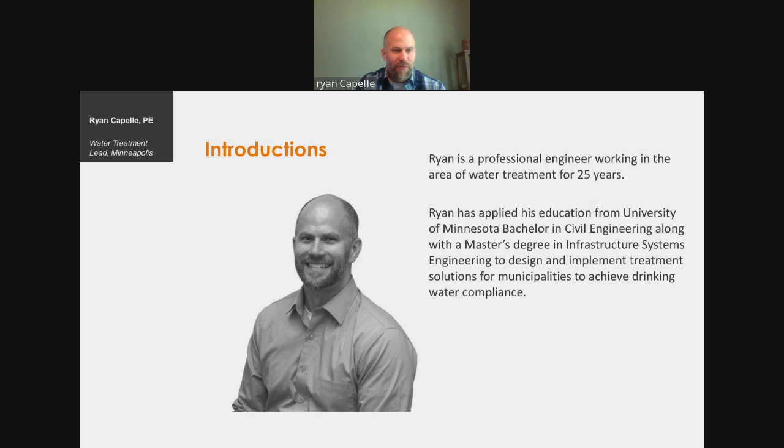Our goal today is to talk with you about PFAS in drinking water, and particularly about solutions that keep municipalities in compliance. The key word here is compliance, because that means different things for different areas of the country, different states, different jurisdictions. My hope is that after this presentation you'll have a better understanding of those differences.

So the agenda: I want to begin by giving a little background on PFAS. Bear with me, I know we're coming from a lot of different perspectives. I'd also ask that you understand the perspectives we're sharing today are our view as of May 12th, 2021. This topic of PFAS is evolving and changing every day, so recognize that we're giving our best view of it as it stands today.

With that in mind, we'll talk about some of the treatment options available to municipalities today. To make it more real, I'll bring in a case study for one of the communities we've worked with, in Cottage Grove, Minnesota. You're fortunate to get an update on the current status of a pilot study that's underway, so fresh off the press you'll get some up-to-date information. Then we'll summarize the solutions we discuss and end with a question period. I expect this to last about 50 minutes, so I'm hoping to give you your money's worth.

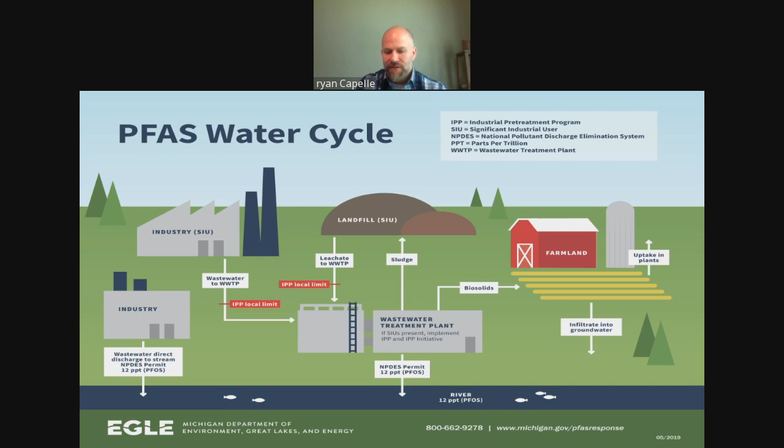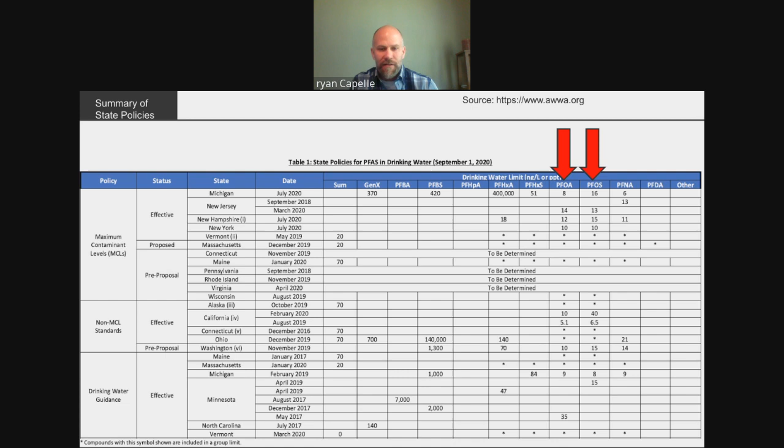But we're looking at, in Minnesota, 7 different substances. And I'll point out, if you can see it, Minnesota is one of the only states that has a guidance value for PFBA, a short chain PFAS substance. You'll notice that number is very high compared to some of the others - it's 7,000 parts per trillion, or nanograms per liter. That'll come into play later in the presentation.

Here's another way of looking at that same data. If EPA has established 70 parts per trillion for PFOS and PFOA, you just see on the bar chart how some of these states are much, much lower than 70. Others which aren't on the list - Joan and I are working with the state of Illinois, they're proposing a limit as low as 2 nanograms per liter for PFOS and PFOA. So that 2 would compare to 70 established by the EPA. A much different perspective depending on where you are.

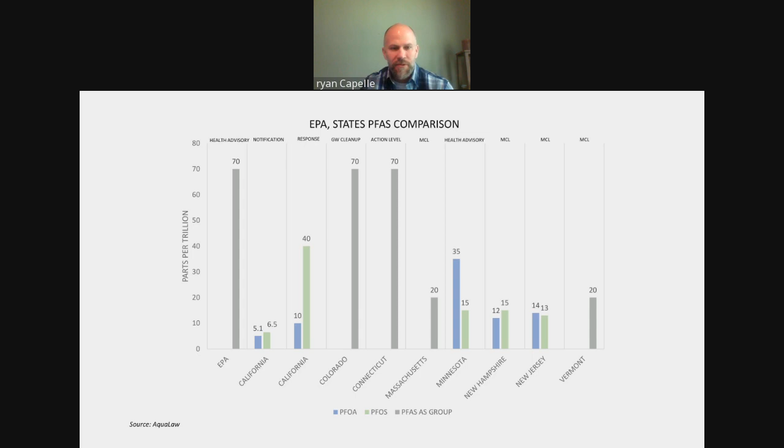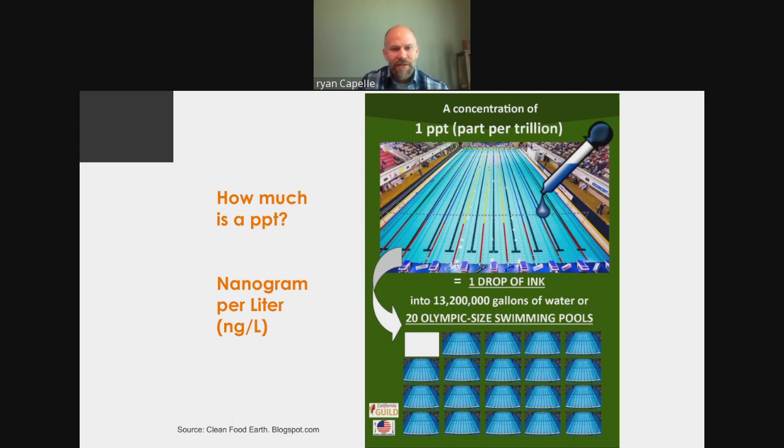I even thought another analogy would be that it's almost like trying to kick a field goal while there's an earthquake going on. And then there isn't much margin for error. We're talking about parts per trillion, nanograms per liter. To put that in perspective, it's 1 drop of ink in 20 Olympic-sized pools. But toxicologists and epidemiologists are finding that just that small amount is enough to make a difference. It's not an easy feat, but the good news is there are solutions out there.

And so I'm here to talk to you about a few of those. Currently, conventional drinking water treatment methods have almost no impact on PFAS. These are forever chemicals, is their nickname, and that's because they are ubiquitous in the environment and somewhat in our bodies, and they don't break down. So we need to explore solutions to give these utilities and water purveyors a chance against this issue.

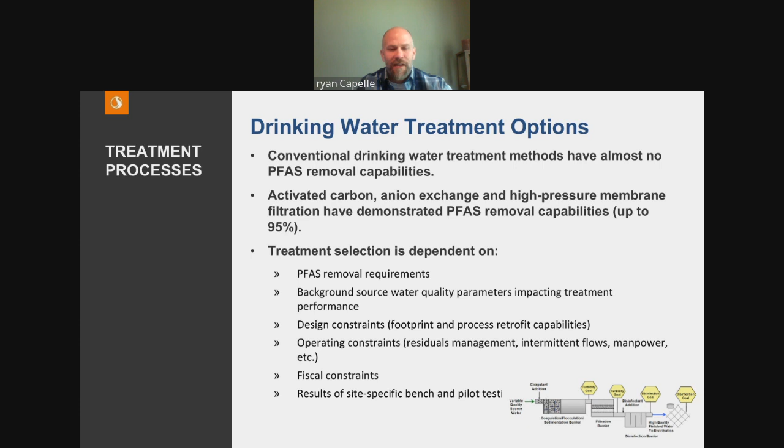The lowest hanging fruit, the most available technologies today, as we see it, are activated carbon, ion-exchange resins, and high pressure membranes. And the good news is they've been proven to be able to remove about 95% of these substances. There's all kinds of factors that I mentioned earlier - we have background source issues, different concentrations, different footprints of these treatment technologies. So some sites may be able to accommodate treatment technologies, others may not. Lots of issues to consider when we're looking at options and solutions.

So here's a simple diagram of the three technologies that are ready for prime time. GAC, the granular activated carbon treatment process, is put together in a column, a downflow column where water comes in from the source, whether surface water or groundwater, and flows through the GAC column, with the permeate coming out the bottom. Same situation with ion exchange resin.

When ion exchange is used as a sorbent, it's typically top to bottom flow. The other option out there is reverse osmosis or nanofiltration membranes. With that, we flow through the membrane and the permeate comes out the other end, free of PFAS essentially, but there's a reject stream. The issue here is we need to do something with that liquid continuously.

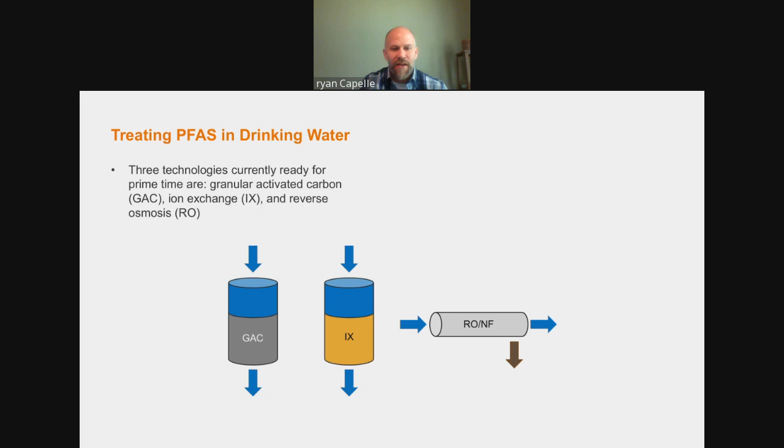The issue with GAC and ion exchange is the material goes through and the PFAS adsorbs to the surfaces of the GAC and the IX, and then eventually becomes exhausted. We can then remove that GAC or IX, ship it off to proper handling, and that can be processed appropriately.

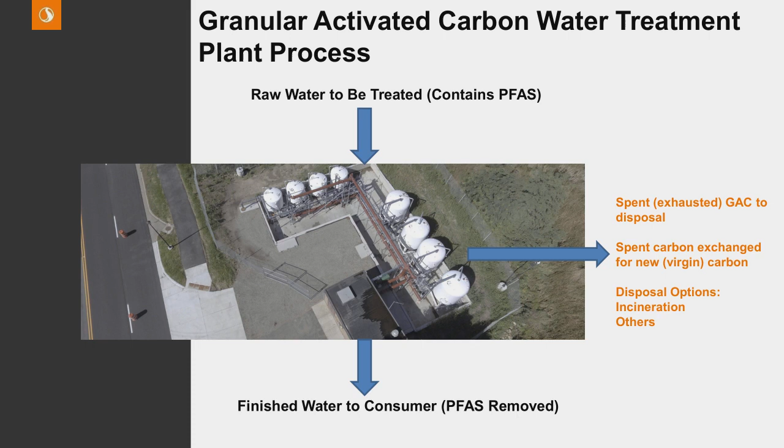So a little closer look at GAC. This is a picture of one of the interim treatment plants we've installed, showing that same concept where water comes in the top of these vessels and the effluent flows out treated from PFAS. But eventually that material has a finite life, and the GAC becomes exhausted, or all the surfaces become covered with PFAS.

So the strengths of GAC are its long, good history of success. It's good at removing long chain compounds, or the 8 carbon chains like PFOS and PFOA. There are multiple suppliers, a lot of study on it. Essentially, it's a very well accepted treatment technology.

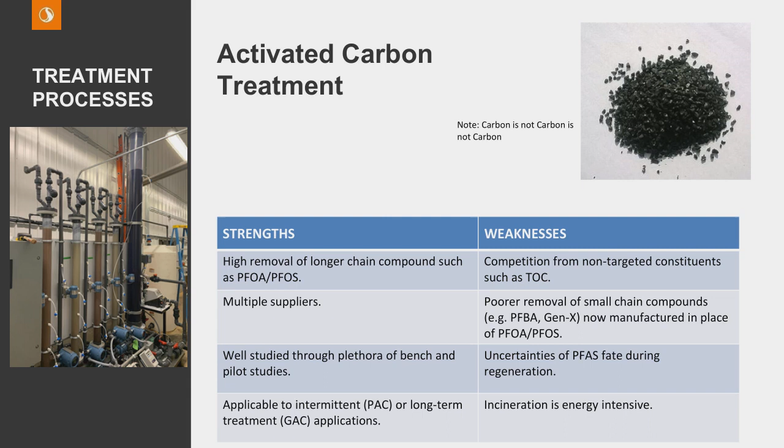The weaknesses are that it doesn't quite have the ability to do its job when there's high TOC. It doesn't do as well against short chain PFAS like the PFBA I mentioned earlier. And there are some uncertainties as to what happens with this carbon once we ship it off.

The important feature of carbon is that we're looking at the empty bed contact time. There's a finite amount of space on the surfaces of these granules that can receive PFAS, so the capacity is finite. Eventually we need to remove that media. In fact, sometimes, as you'll see later, some material can get kicked off of the surfaces through the treatment process, and we actually end up with higher concentrations in the effluent. So we need to watch that with GAC and be cognizant of the empty bed contact time.

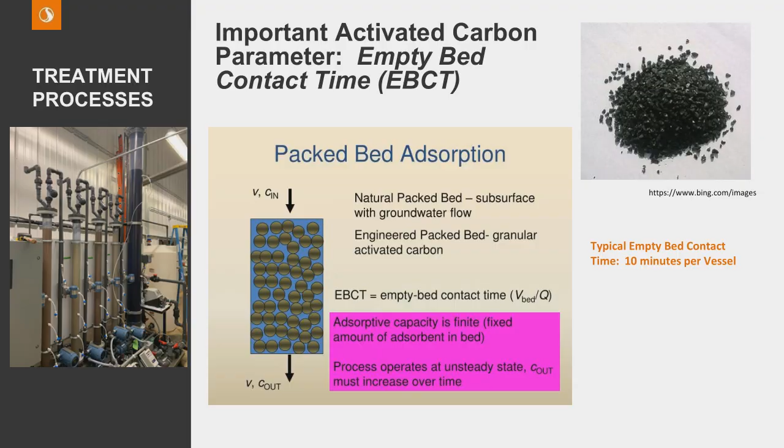Another example with GAC is that we use a lead-lag configuration. There's a redundant filter, if you will, where we go through a lead filter and capture and test for the PFAS substances in the effluent. Then that effluent runs to the lag filter and runs through a second course of media. That way there's a safety factor that the Department of Health can observe and monitor that lead vessel to know if things are starting to break through before knowing they have a lag vessel available.

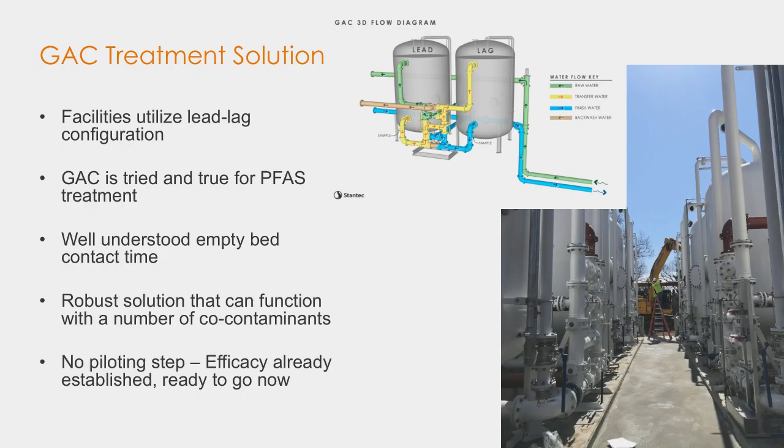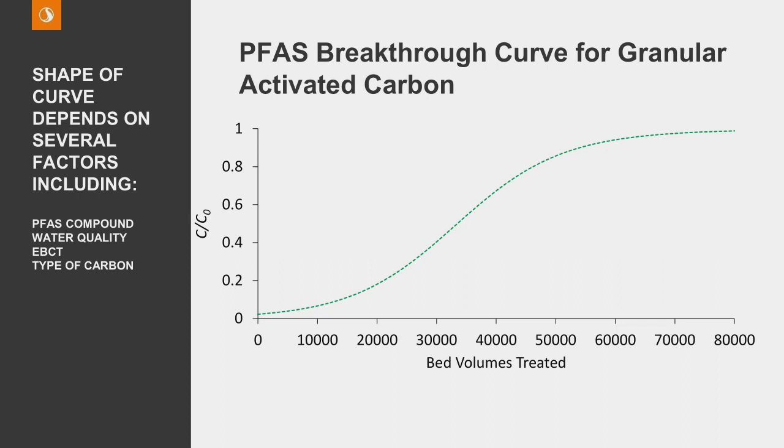So it's tried and true, a robust option out there for utilities to use. With that understanding, we know roughly, or generally, with a given water quality, how long the carbon can last. It's site specific, definitely specific to water quality and different parameters like TOC and concentration. This graph shows concentration on the left and bed volumes of throughput on the bottom. Over time, we can gain an understanding of what the breakthrough curve looks like, and we can start to predict how many bed volumes we're going to get through for a given water quality.

So now we can move on and talk about ion exchange as another solution option. The strength for ion exchange is it's a little better on short chain PFAS, which I'll show you later, and still effective on the longer chains. The issue with TOC is a little less than that of GAC, and there are shorter empty bed contact times required for the same removal. That means we can pack this material into smaller vessels and a smaller footprint.

The weakness, and you'll see this firsthand in results, is that there are some issues with complexing materials in the water, such as iron and manganese or other metals, and sometimes those can really cause a problem if we don't have pretreatment. For cleaning this, it's not a type of material we can clean safely with drinking water - it's a one pass option for the most part. There are folks out there trying to generate regenerable ion exchange resins.

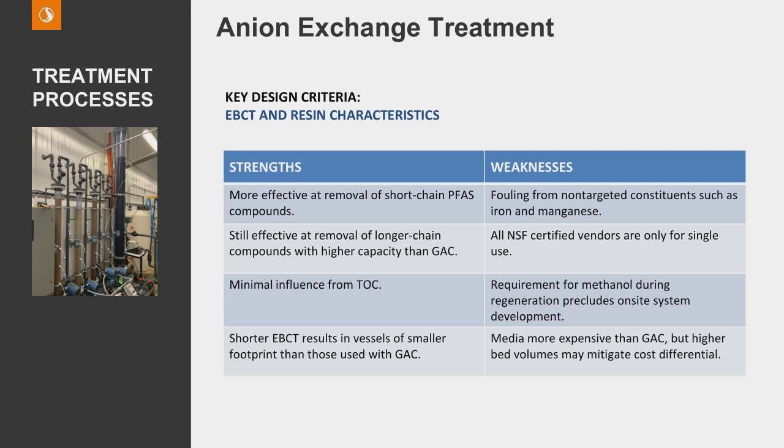To give you a little picture here, like the other with GAC, we have water that comes in the top of these vessels, the effluent comes out the bottom, and eventually we will entirely remove the ion exchange resin and ship that off for processing.

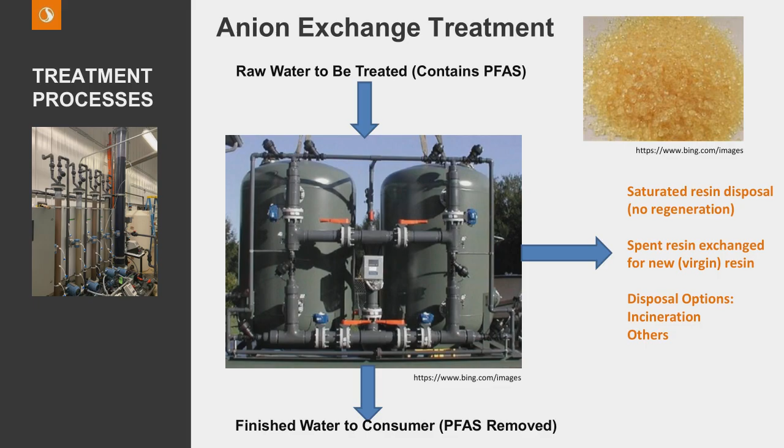The next option is reverse osmosis or nano filtration. The strength here is that it removes nearly all of the substances, 99%, and there are multiple suppliers. The weaknesses are that there's limited disposal options, and like I said earlier, there's that consistent reject stream that we have to deal with.

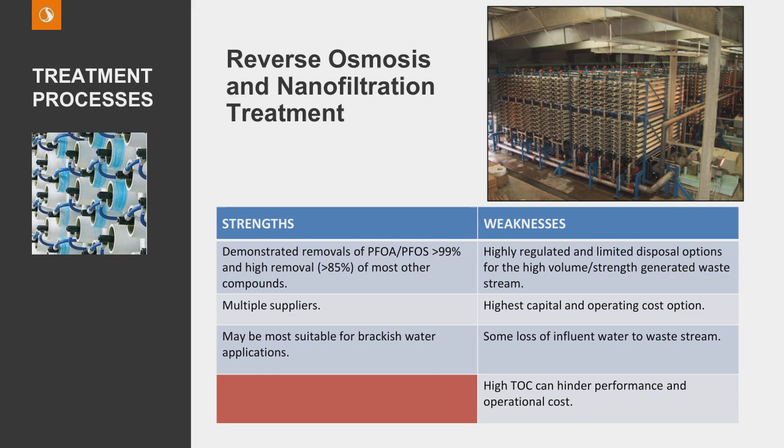That reject stream is going to contain PFAS, so now what do we do with that? There are companies, as we speak, working to develop technologies. We know there are super adsorbers out there that can receive that reject stream, and eventually those types of sorbents will become more commonplace, and we may be able to see reverse osmosis used more as a common treatment solution for PFAS.

But as it stands right now, as far as our team is concerned, the two lowest and most viable are GAC or ion exchange. I mentioned all the different folks out there developing, everyone's trying to solve this issue and design a better mousetrap, if you will. There are novel adsorbents being considered, anything from coconut to different synthetics.

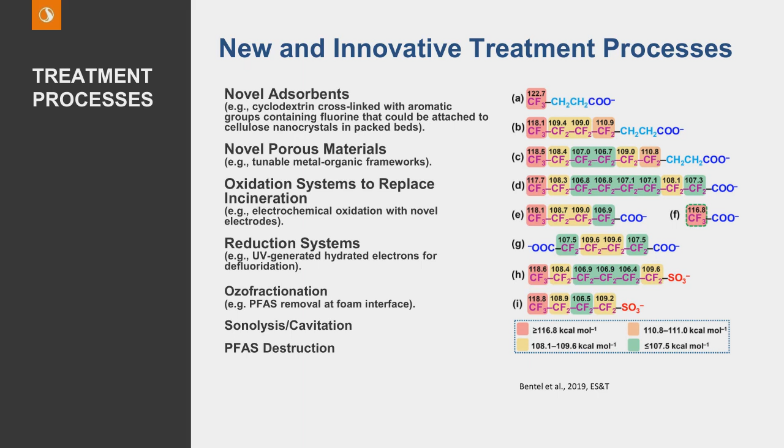We're looking at porous materials, oxidation systems, redox, ozofractionation, sonolysis, and ultimately the holy grail would be if we could find a technology that actually breaks the fluorine carbon bond. That's something that is very difficult to do, but there is promise out there. I've observed systems myself at the academic level that are showing promise in being able to break that PFAS and destroy it. Just not ready for prime time as we speak.

When it comes to providing solutions, we want to help these communities that are in some cases in a state of crisis. One of those is Cottage Grove, Minnesota. So this is where I want to try to give you a little real world example, with a little background before we dive into Cottage Grove, Minnesota.

Minnesota is the home of 3M, Minnesota Mining and Manufacturing, a company that back in the 40s and 50s was generating these PFAS substances for different things, like stain-resistant carpets to the Teflon on your pots and pans. Wonderful innovations and great engineering took place, but now as we learn that it can cause health issues, we need some innovation to try to remove those substances from the ground.

Already in 2002, we were finding health impacts, and the city of Oakdale in Minnesota had to go through and install treatment. Fast forward to 2017, the Minnesota Department of Health instituted what they're calling health-based values. This is kind of a precursor to health risk limits. The upshot is that when those limits were established, based on toxicology testing and thorough analysis throughout the course of essentially 2002 to 2017...

...8 of Cottage Grove's 11 wells were beyond the health-based guideline. That pushed the city into a situation where they had to either tell their residents that our water is non-compliant, or take action. And they chose to do the latter.

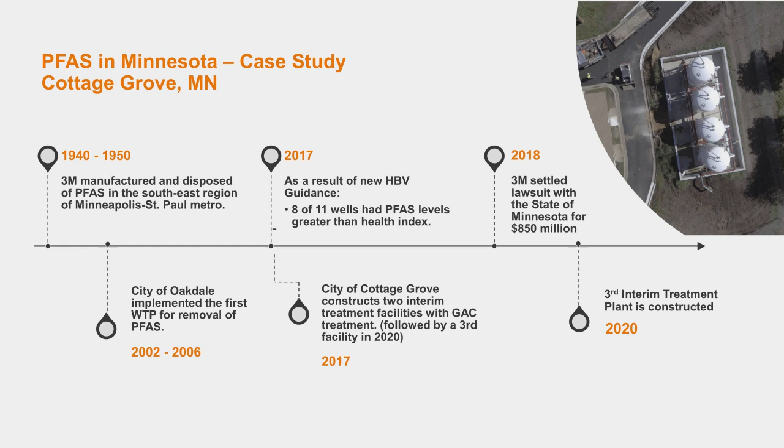It was after that settlement, just last summer, that we realized PFAS concentrations were rising and we had to install a 3rd interim treatment facility. Those interim facilities are now opportunities for us to learn a little bit more about PFAS in the groundwater in this case.

So just to give you a visual of the issue in Minnesota here, the dark shaded areas are areas where PFAS was disposed, and the PFAS found its way into both surface water and groundwaters, making its way across a large portion of the southeast metropolitan area of Minneapolis and St.

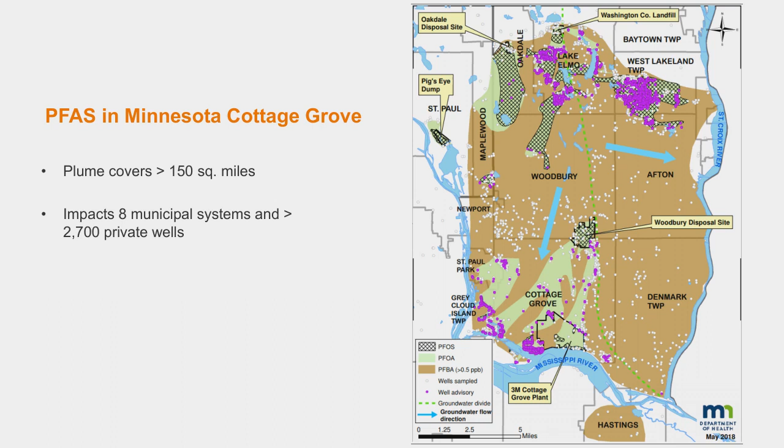Paul, covering 150 square miles, impacting 8 municipal systems and 2,700 private wells. As that plume moved across the region, it found its way into both the Mississippi River and the St. Croix River, bounded on the south and on the east.

This gives you, it's not a very clear picture, my apologies, but a large portion of the southeast metro is impacted by this, including 14 communities. So it's a real problem for the utilities in those areas.

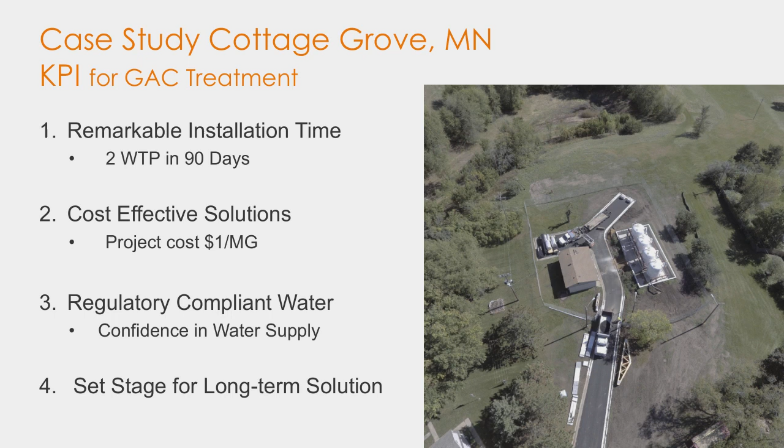But the good news is, with those interim facilities that we installed, we found great success. We were able to get them all completely installed and closed in less than 90 days. The solutions were cost effective, essentially about $1 a gallon. So if we had 1 million gallons treated per day, it would be about a $1 million facility. The water that we produced, and you'll see the results later, is compliant. Keyword again is compliant. And it set the stage and bought time for us to develop long-term solutions.

Let's dig in a little more specifically. Where do we go from here? With those solutions in place, like I said, we have time, but we want long-term answers.

The Minnesota Pollution Control Agency authorized a pilot study. Joan and our team at Stantec have been able to work with the MPCA, the Department of Health, and the City of Cottage Grove to develop a study that would compare ion exchange resins directly to GAC and find out if, in the case of Minnesota, the only approved method is GAC treatment. So we want to see if IX could have the mustard to meet MDH's requirements as a treatment technology. And then ultimately, we want long-term solutions.

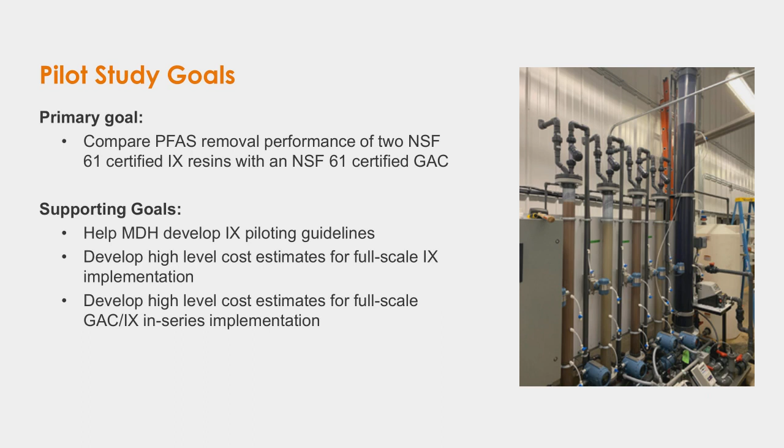We also are going to provide the state with some high-level cost estimates and comparisons, because the economics of these two sorbents is very important. For example, GAC, as you can see in this photo, is the column on the right. It's much larger because of the greater empty bed contact time. Ion exchange is a shorter empty bed contact time. GAC is much less expensive to buy the material. Ion exchange is much more expensive for each little cubic foot or pound of material. The differences are, though, that with the smaller footprint required for ion exchange, we can build a smaller facility. So you really have to focus on the economics to find out which of these is more cost effective.

Here's a little closer look at the pilot, some 3 different views. Like I said, we established an experimental plan. One of the other key facets of this study is that we were able to secure Johns Hopkins University through an alliance with Stantec to conduct all of our analysis for the PFAS substances.

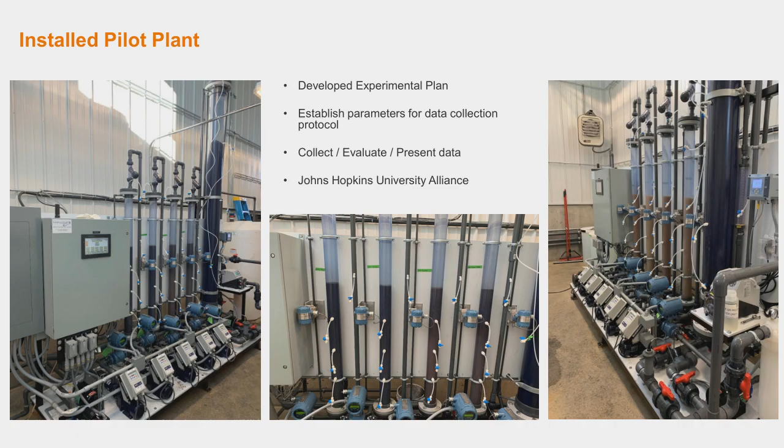That's a real key advantage. It's a research laboratory, and they're able to turn around the testing in 4 days compared to, say, a commercial lab, which would take more like 3 to 4 weeks. And so we're happy to have them on the team.

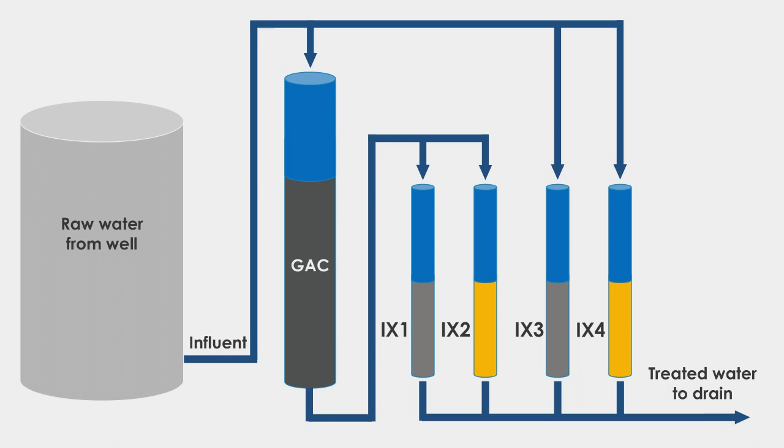Essentially, we're dual treating this water stream, and we're going to compare that to the others which are being directly compared. Granted, it's not a fair comparison because we know the effluent from these 2 is essentially getting dual treatment.

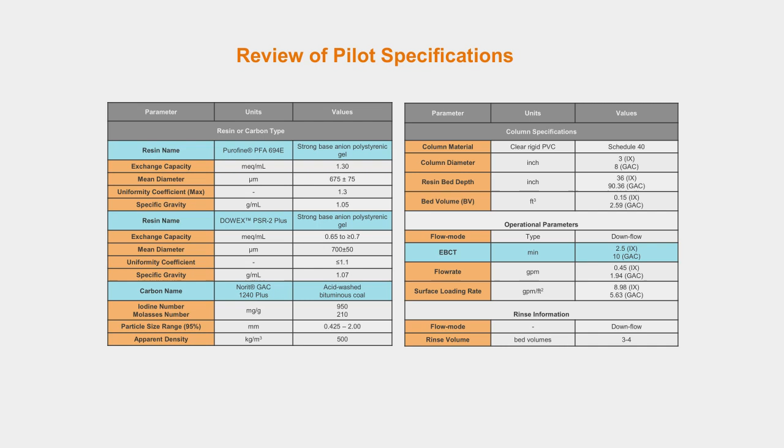Not to belabor this, I just wanted to point out the empty bed contact time differences: for the ion exchange, 2.5 minutes; for GAC, it's 10 minutes. So there's a factor of 4 involved here. We're also looking at a Dow resin and a Purolite resin for comparison. Not all GAC is created equally either - the GAC we're using, and have used in the interim plants, is a Norit Cabot product, a 1240 Plus acid washed product. There are all kinds of different types of GAC to consider as well - some are agglomerated, some are acid washed, and so forth.

For example, with port 1 on a 2.5 minute empty bed contact time, port 1 at about 1/3 of the way through is showing a 0.83 empty bed contact time. That gives us an idea of what we can expect later on as we get water flowing all the way through the 2.5 minutes. We'll show you more about this in a moment.

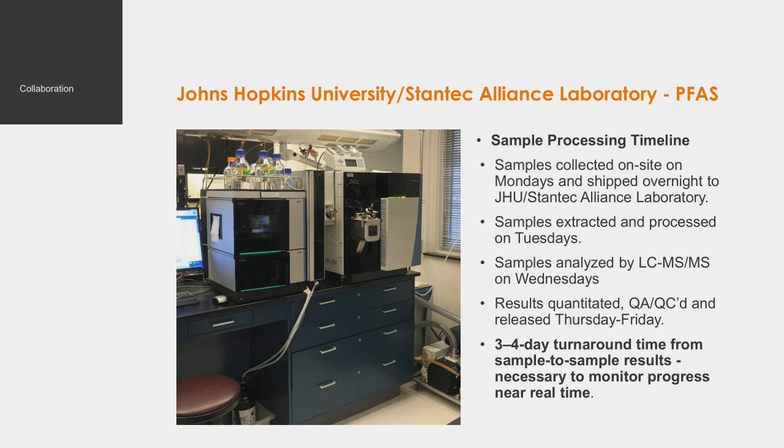Like I mentioned, we don't have to belabor this, but the Johns Hopkins University Alliance differentiator was the bullet on the bottom: 3 to 4 day turnaround. That's very important to us. We've had some issues as we start up the pilot and operate it - it's been in operation for 1.5 years now. We've had different things happen where if we didn't know the results within 3 or 4 days, we had to wait 3 or 4 weeks, which would have wasted essentially 3 or 4 weeks of study. So having that turnaround is very important.

Some of the early observations - this is kind of the bonus part for you folks. With the pilot, we're finding iron and manganese are both a key complexing issue with the ion exchange resin particularly. We're also finding that PFBA breaks through both ion exchange and the GAC relatively quickly. There were hopes that ion exchange would do better, and it does do better on some of the shorter chain substances, but PFBA, one of the shortest chain substances, breaks through both quite readily.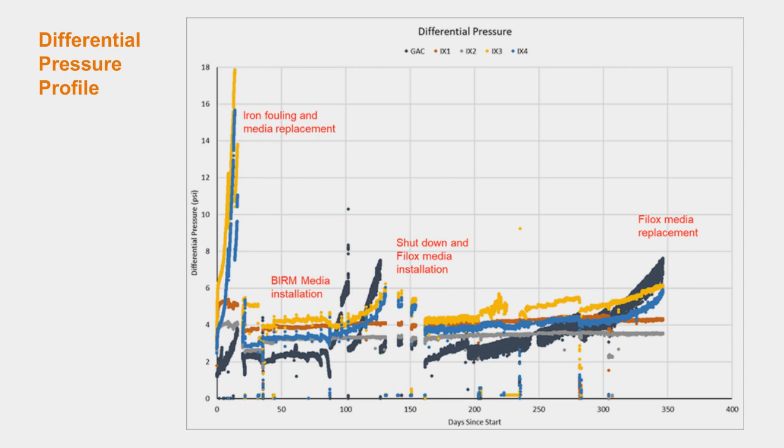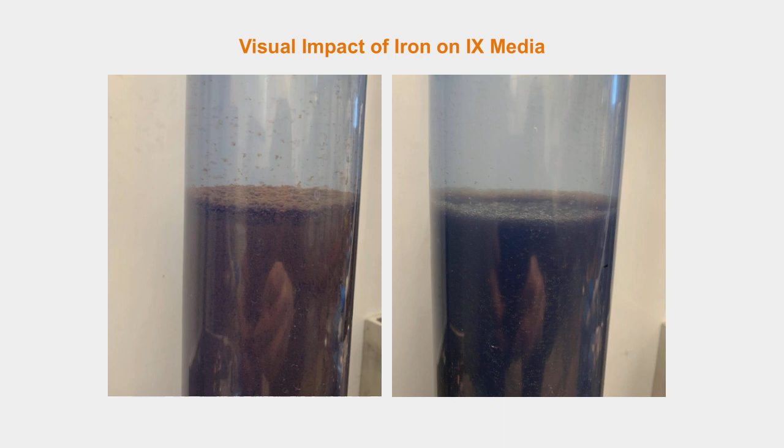Bringing home some pictures of what's happening. The column on the left shows flocs of iron building up and blinding off the ion exchange resin that's taking water directly from the storage tank. The column on the right is the resin essentially being pre-treated by the GAC. The iron is being captured in the GAC, and the effluent from that is coming onto this column, and you don't see any iron buildup. Very clearly, we have an iron issue.

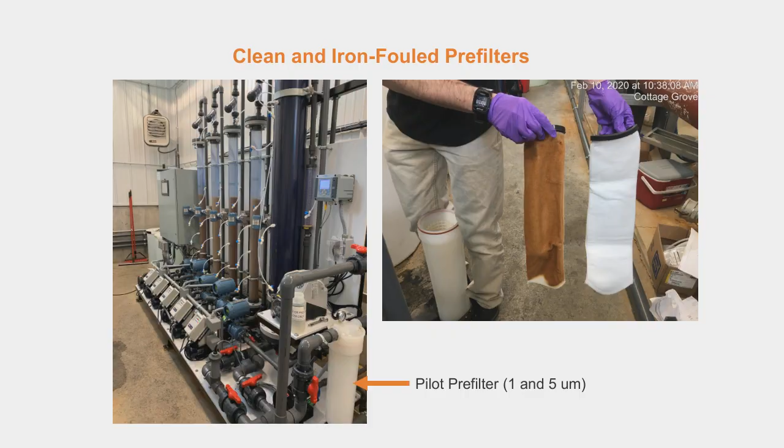The next slide illustrates the pre-filtration cartridges that we started using. It's like coffee grounds compared to a clean filter there on the right. We implemented that cartridge filter upstream of the pilot, and it's a 1 micron filter. We started with a 5 micron, but that didn't cut it. So let's get into some more specific test results.

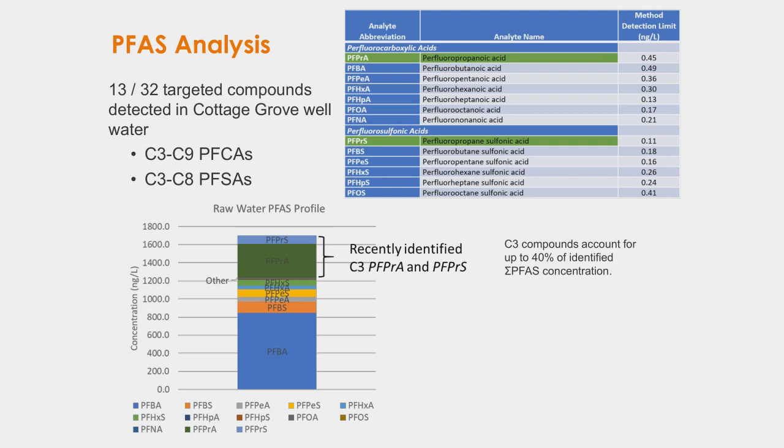You start to see how each water quality is different in this lower chart. In the case of Cottage Grove, the majority of the substances that contribute to the water coming out of the GAC is PFBA. We also have contributions from PFPrA, propanoic acid, which we'll talk about here in a bit.

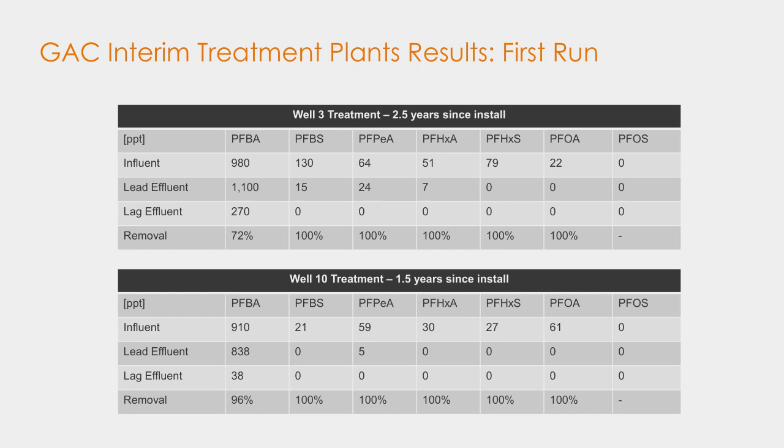So here's the other well that was being treated in Cottage Grove, and we're getting almost 100% removal in most of these, and very good removal still of PFBA.

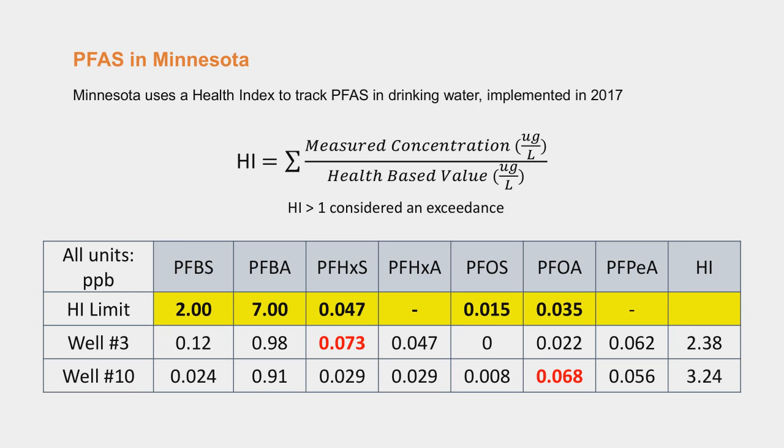This is a little breakdown of the health index that I mentioned earlier. It's a bit confusing, so I'm not going to belabor it. But as we decrease the health-based values, as the Department of Health changes their perspectives in the study of the toxicology of these substances, they will change the health-based values as they gain more understanding. As those values change, it affects the overall index. The index is a summation of these 7 contributing substances, which for Minnesota are the ones they've decided are important for human health. So as we decrease one of these health-based values in the denominator, it increases the effect, contributing a greater amount to the overall index and potentially creating a non-compliance.

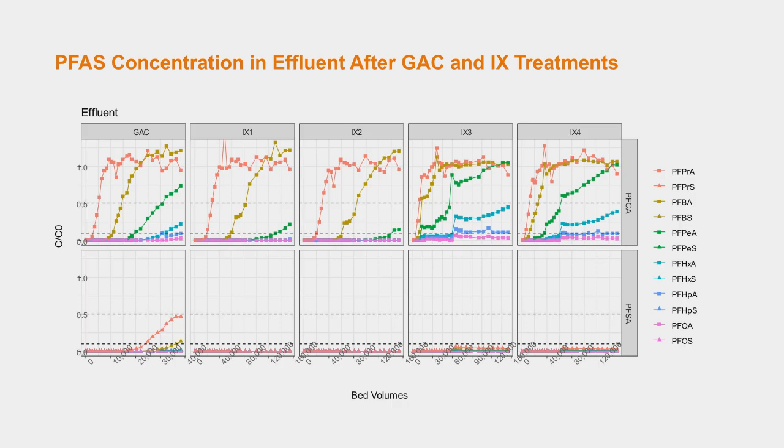And very much like other things, we're trying to really focus and improve and tailor our treatment regime to match the given water quality issues. Here's another way of viewing the results.

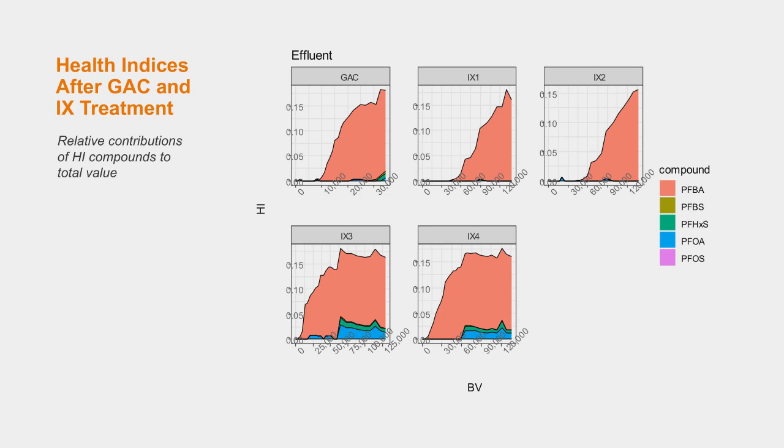The colored portion shows the contributing amounts of these substances to the health index as Minnesota evaluates it. So with GAC, the majority of what's contributing to the health index is PFBA. There's a little bit more of these other PFBS, PFHXS, PFOS, and PFOA in the GAC. Ion exchange 1 and 2 are essentially dual treated, so that's not a fair race — we don't see much except PFBA there. But IX3 and 4 really illustrate how some of those PFOA, the carboxylic acids, are starting to break through quicker through the ion exchange resin than the GAC, and it's depicted with color here a little more clearly.

So another tool in our toolbox, as we're looking at this pilot study, we're thinking about the duration of time to gather results. That pilot's already been running for a year, and we're getting to a point where we want to try to model what's going to happen. So our team started looking at the available models that are out there. There's a scaled model, there's a taper desorption model, and a composite model. These models attempt to mimic what the breakthrough curve is going to look like for a given water quality based on a throughput volume of water.

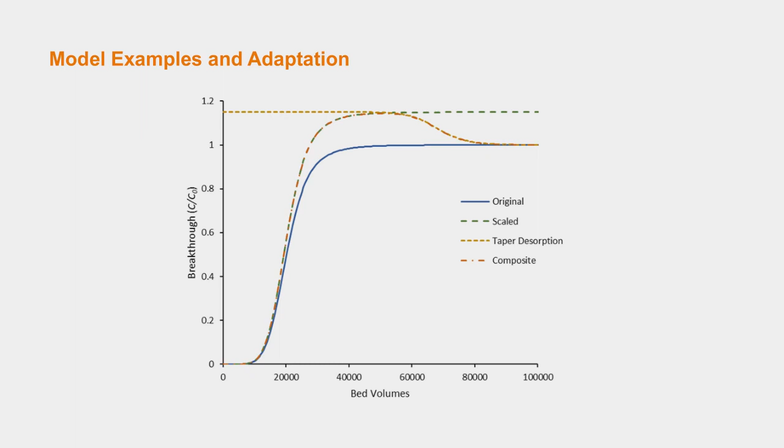What you're seeing in this top curve is the acknowledgement that there are some transformation breakdowns of PFAS substances that occur, and also some desorption. So we want a model that can accommodate and account for that transformation and desorption. With our testing at Cottage Grove, we've been able to apply models and tailor them and gather data based on the port 1 coming through the GAC. This is only for GAC so far, as we're gathering data on the breakthrough of concentrations of these substances over the course of time.

And then we apply our models, and you'll see in the next slide that the models are actually very close to tracking with the data. So we're encouraged by our ability to potentially predict, with a given water quality, how long the GAC will be able to last, so we can start to plan ahead for when we're going to need to exchange the media.

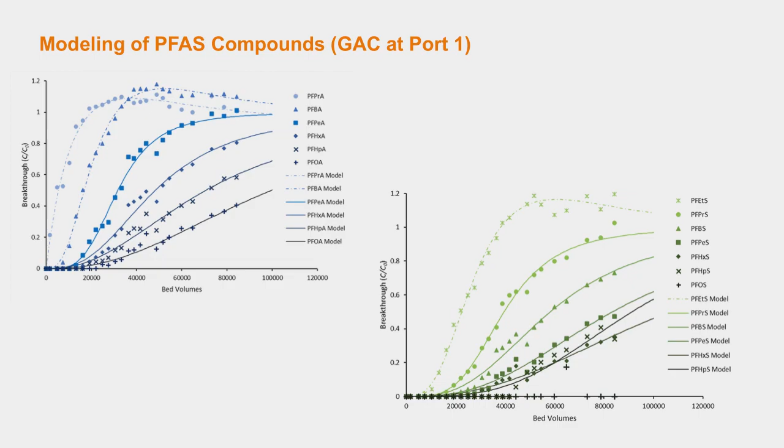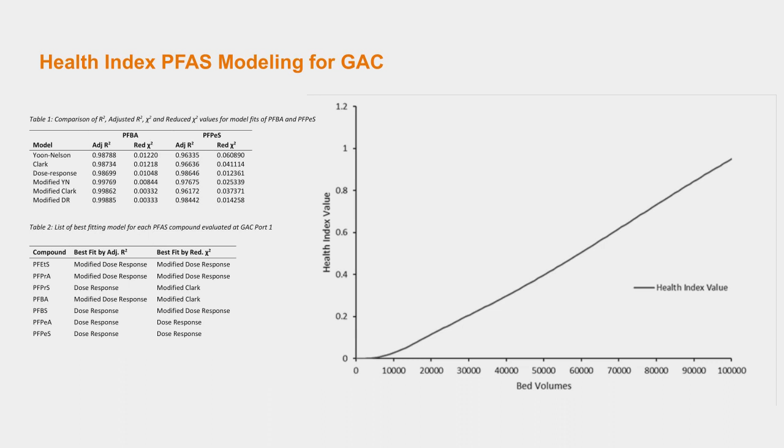And if we do enough testing and compare R square values and chi-square, we're going to be able to develop a curve that for each given water quality, for a certain type of sorbent—in this case acid-washed GAC—will be repeatable. We'll be able to know, for example, in the case of Minnesota where the health index is 1, we've got about 100,000 bed volumes before we're going to start to exceed. That can become very helpful to these municipalities as we're trying to find them solutions for PFAS.

Okay, so we have a bunch of different solutions. The topic of this presentation was to try to find solutions for municipalities to keep them compliant with those ever-changing rules that are out there. So to summarize what we discussed: based on full scale and pilot scale performance, we know GAC is a reliable solution for PFAS, at least as it stands with the Minnesota Health Index as our key example. We also know that modeling can help predict sorbent performance, as I just showed you, with a given water quality, and that's something that can be used to help these municipalities comply.

Also, based on pilot study performance, we know that ion exchange is showing as a viable option for providing compliant water, at least in terms of the Minnesota Health Index—recognizing that each state, each region, and the US EPA all have different definitions for what compliant means. Also based on pilot study performance, GAC followed by ion exchange shows good promise, but we essentially need more time, more bed volumes, to really prove out the slope of those breakthrough curves so we know how that compares directly to these other regimes.

To truly be fair, we would need to compare GAC followed by IX to a GAC-GAC or an IX-IX lead-lag configuration, which we don't currently have accounted for in the pilot. At the end of all this, we need to look at the economics and compare the cost of each of these sorbents, the cost of the facility, and the bed life expectancy for each of them to truly compare the economics of these three options.